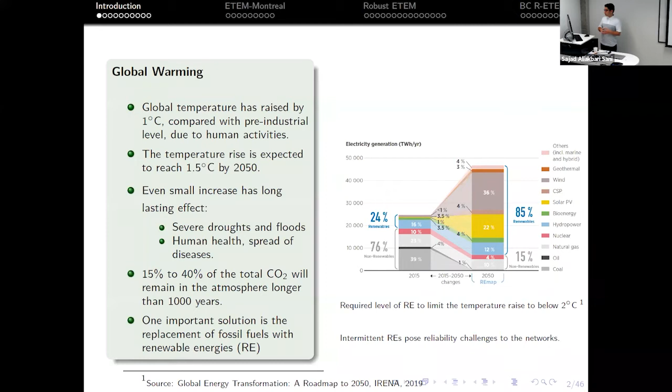But this is not easy because it poses challenges, since renewable energies are intermittent, posing reliability challenges to the network. One way to cope with this issue is to add flexibility to the power network.

Flexibility of the power network is defined as the capability of the power network to respond to changes in the supply side and demand side.

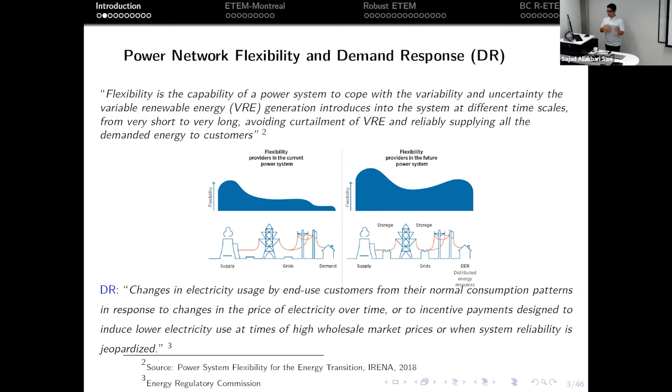The flexibility in the demand side is called demand response, meaning the capability of the network to abruptly reduce demand when, for example, the price of electricity is high or when the system is in jeopardy.

One important source of providing demand response is electrical vehicles, grid-integrated electrical vehicles. They are specifically important because, first of all, they are considerable - they consume a lot of energy in the network. Secondly, because of the timing of their use, they can be controlled by the power network operators.

But there are some challenges. For example, they are spatially and temporally imbalanced loads, and because they were developed for another purpose - to satisfy mobility demand - any change imposed by the power network can interfere with the operation of the mobility demand.

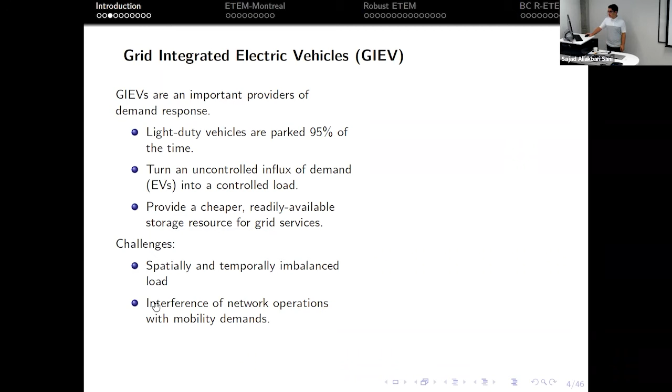In this research, we want to first, using the capacity expansion planning problem, identify a long-term grid investment plan considering demand response. Second, we want to address one of the most important issues in demand response: the uncertainty of the demand response. Then we want to focus on the demand response provided by electrical vehicles, and integrate their uncertainty into the capacity expansion planning problem.

But what is the capacity expansion planning problem? It is a long-term classical energy network problem that gets as input a prediction of the future of technologies, useful demand, fuel costs, and other resource availabilities. And it calculates the optimal investment and installation of each technology, and optimal energy procurement.

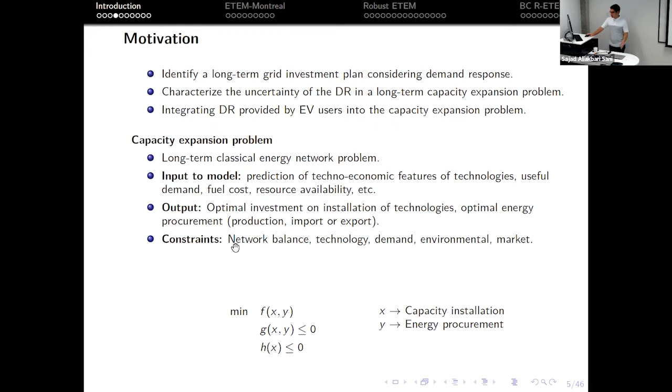There are some generic constraints, including network balance constraints, technology, demand, environmental, and market constraints.

In this research, specifically, we focus on the ETEM model - Energy, Technology, Environmental Model - which is a specific capacity expansion planning problem from the family of MARKAL-TIMES models. It's a long-term capacity expansion problem with a horizon between 30 and 50 years. It's a large-scale linear program with the objective of minimizing the total cost of the system.

One salient feature of ETEM is that it explicitly models demand response. It is important in capacity expansion to consider demand response because it acts as a kind of reserve capacity for the system, meaning that when we invest in providing demand response, we need to install less physical technology in the network.

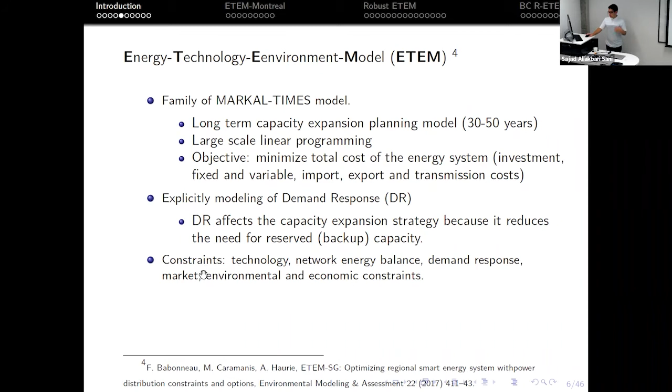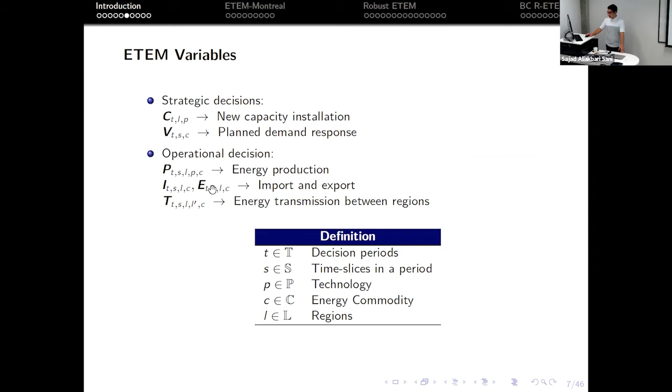Let's have a closer look at the variables in ETEM. There are two categories of variables: strategic decisions, including new capacity installation and planned demand response, and operational decisions, including energy production by each technology, import and export of energy from and outside the system, and energy transmission between different regions.

The objective function minimizes the discounted total cost of the system, including the investment cost, fixed cost, variable cost, import, export, and transmission cost.

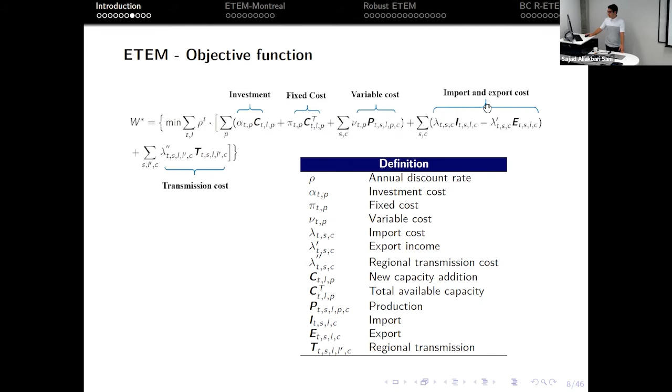Here are some important constraints of ETEM. ETEM has many constraints; I just mention some of them to give you an idea of what ETEM is modeling.

We have energy balance constraints that guarantee that the procurement of each energy commodity C at each time T and time slice S should be greater than its consumption. The procurement itself includes the production of energy, import of energy, and net transmission from different regions.

We have capacity constraints that say the available capacity of each technology is the summation of the previously added capacity to the system, plus whatever we have already installed in the system before the start of the planning horizon. Then we force the production of each technology to be smaller than the available capacity.

We have technology efficiency constraints that relate the input and output of each technology.

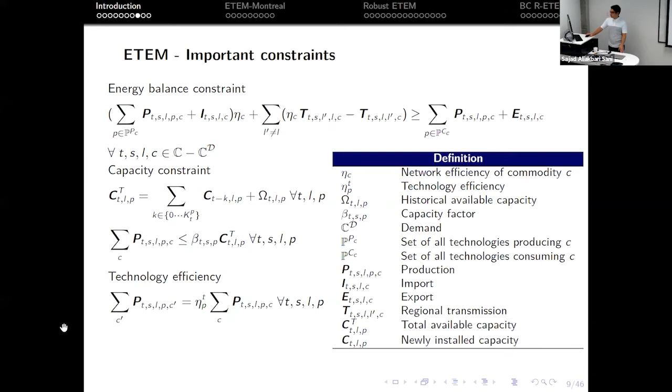Here is one important constraint in R-ETEM: the demand response constraint. This is how R-ETEM models demand response. In the first constraint, you see that the production of energy service C should be greater than the total demand. This total demand consists of two terms: the first is the annual demand, and this variable V is the demand response, which optimally distributes the total demand at each period to different time slices in a day.

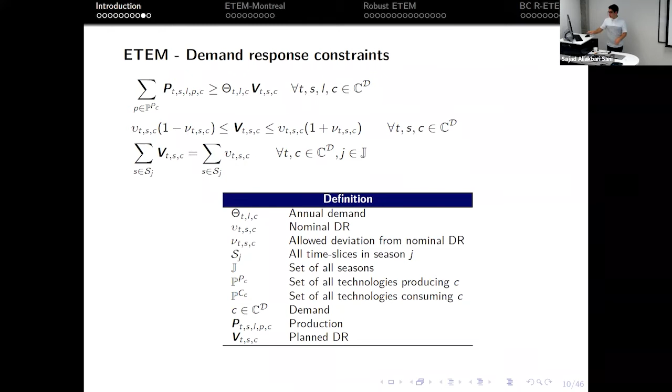We define a bound for the value that this demand response can get, and this bound is around the nominal value for the demand response. We also force that the summation of the demand response at each season equals the summation of the nominal value, meaning we are not allowing the model to shift demand response from one season to another. We are only shifting the demand from one time slice in a day to another time slice in a day.

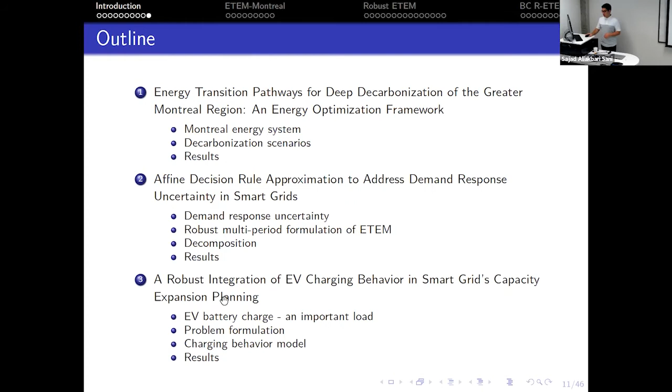Having this introduction, I will present three of my papers. In the first paper, we use R-ETEM to identify the energy transition pathway for deep decarbonization of the Greater Montreal region. In the second paper, I investigate integrating uncertainty into the capacity expansion planning problem of R-ETEM. And in the third paper, I focus on the demand response provided by electrical vehicles.

The first paper is published in the Journal of Energies.

We know that Quebec plans to reduce total GHG emissions to 37.5% compared to the 1990 level by 2030. In order to reach this target, there are already-in-effect strategies, including spending a budget of $6 billion to accelerate electrification in the transportation sector, promoting the utilization of bioenergies, renewables, and natural gas in the commercial and industrial sectors, and improving the performance of final energy consumption in residential buildings.

But the question is, among all of these investment options, what is the best basket of options to invest in order to reach the environmental targets?

In order to answer this question, we model the entire energy chain of the Greater Montreal region from resources to useful energy. Then we optimize the expansion of the system in order to satisfy future demand under different environmental scenarios.

Why are we using R-ETEM? Because R-ETEM is suitable for modeling at an urban scale, as it focuses on both generating technologies and technologies on the demand side, which are end-use technologies.

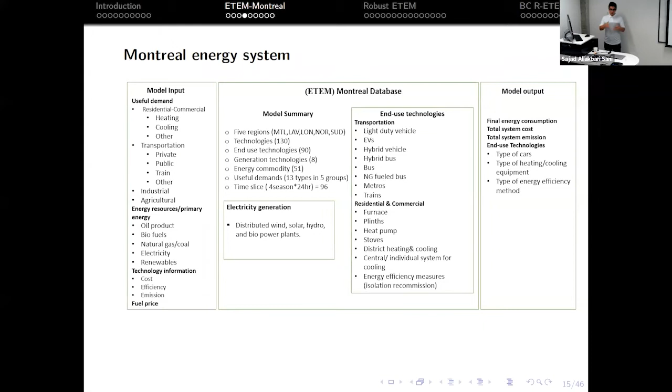The model output is the optimal capacity expansion planning and the optimal investment in different sectors in order to reach the environmental targets. In this slide, we have defined different scenarios for the GHG emission reductions.

The business as usual scenario assumes there are no constraints on the total emission. There are only already-in-effect policies, for example encouraging electric vehicles by the government.

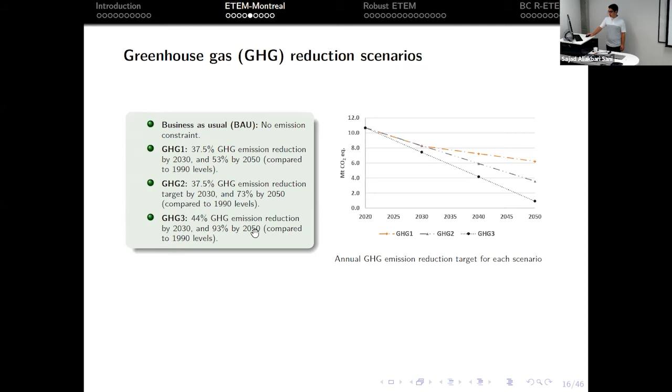GHG1 assumes 37.5% GHG reduction by 2030 and 53% by 2050. The more stringent scenario is GHG2, which assumes 37.5% GHG emission reduction by 2030, linearly reducing to reach 73% by 2050. The last one is GHG3, which assumes 44% reduction by 2030 and 93% by 2050.

This slide has a closer look at the transportation sector and looks at the main strategies in the transportation sector. First of all, you see that the consumption of gasoline will reduce drastically, and it will be replaced by electricity. This is even in the business as usual scenario, mainly done by investing in hybrid vehicles in private transportation and diesel, gas, and hybrid buses in public transportation.

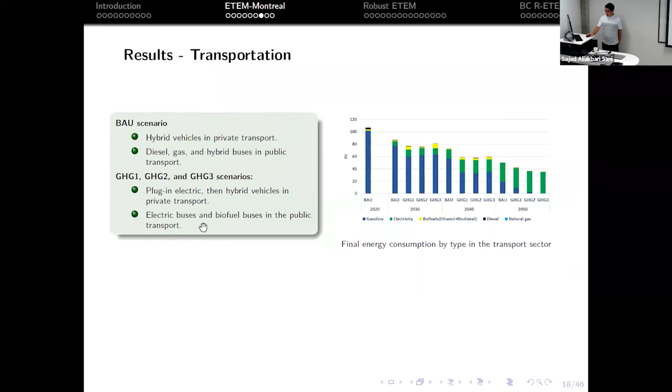But in the more stringent scenarios, including GHG 1, 2, and 3, the model chooses plug-in electric vehicles rather than hybrid electric vehicles, and electric buses and biofuel buses in the public transportation sector.

This slide has a closer look at the residential and commercial sector. You see that in 2020, the main fuel consumed is electricity, and in the commercial sector, it is natural gas. In the business as usual scenario, in the residential sector, because there is no environmental constraint, the model shifts to natural gas.

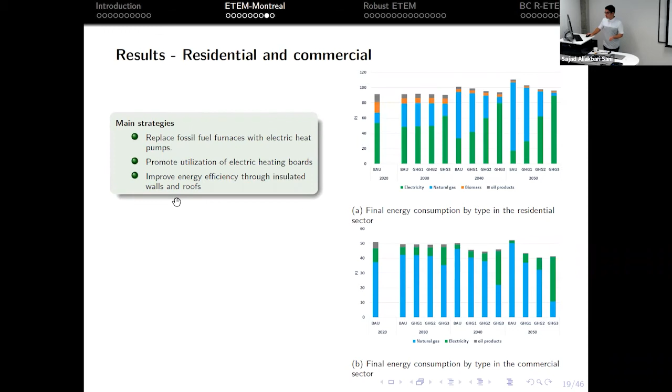But in the more stringent scenarios, GHG 1 to 3, electricity will take most of the share in total energy consumption in the residential sector. We see a similar pattern in the commercial sector, achieved by main strategies: replacing fossil fuel furnaces with electric heat pumps, promoting utilization of electric heating boards, and improving energy efficiency through insulated walls and roofs in the residential sector.

So in the first paper, we used the R-ETEM model to model the entire energy chain in Montreal island, and we defined different environmental scenarios to see the contribution of each sector in reducing total GHG. We saw that in the residential and commercial sector, the main strategies were utilization of heat pumps and electric heating boards, and investment in energy efficiency of buildings, which reduces total energy consumption.

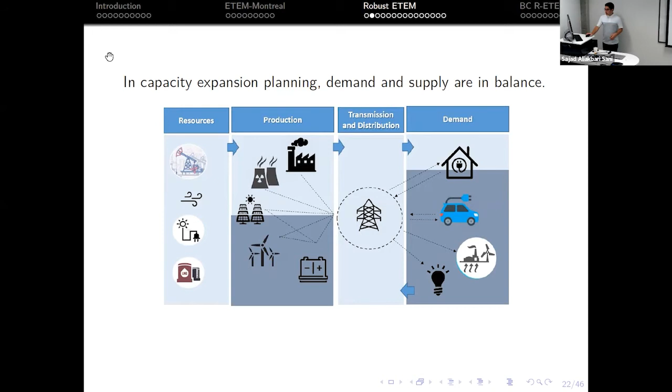In the second work, we focus on the uncertainty that arises from demand response. We know that in an electrical network and capacity expansion problem, demand and supply should always be in balance. To guarantee this balance in the traditional network, flexibility of the supply side was proposed. For example, we had flexible technologies that could come online abruptly, and energy storage technologies.

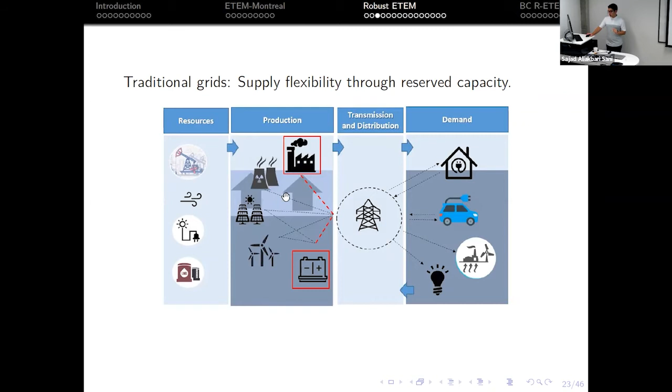With any deviation in either the supply side or the demand side, we could reduce or increase production abruptly. But in the smart grid, with the increasing share of renewables, we need flexibility on both sides, both the production and the demand side.

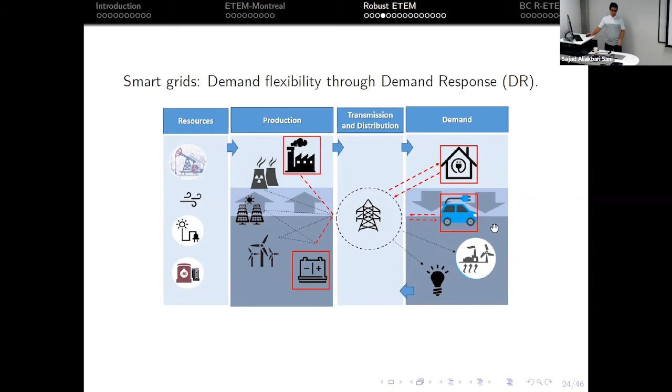The flexibility in the demand side is called demand response. Demand response is considered as a reserve capacity. When we invest on the demand side in a smart grid, we need fewer physical technologies to add on the supply side. That's why demand response is considered as a kind of reserve capacity.

But it is challenging for planning, especially in a long-term planning problem, because we cannot exactly estimate the actual contribution of people in demand response forecast. So on one side, we might invest a lot in physical technologies but have a system with idle technologies most of the time. But on the other side, we might invest on the demand side, but we may have the risk of capacity shortage in the future. So the question in this research is: what is a risk-averse capacity expansion policy considering the uncertainty of demand response?

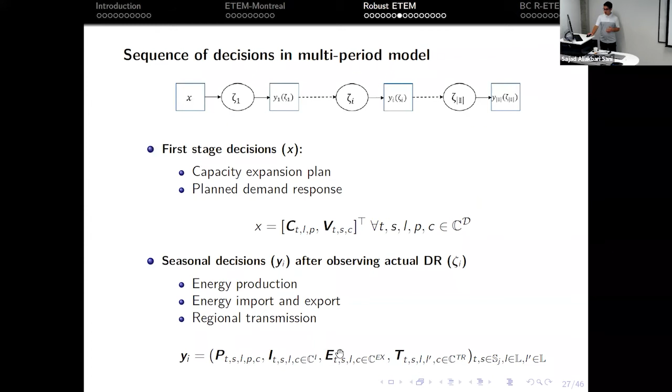These two decisions are gathered in variable x, and based on a seasonal period, when we have the actual information about the actual demand response, we decide on the seasonal energy procurement.

Energy procurement itself consists of energy production, import, export, and regional transmission. So our robust multi-period model will have this form: we have a min-max problem. We are minimizing our decision variable x and y, and the nature is maximizing, or choosing the worst scenario regarding the demand response.

The thing that is important here is that the variable y is adaptive with respect to the uncertain parameter, meaning that at each season, first we observe the actual demand response and then decide on the energy procurement. This model is known to be NP-hard and cannot be solved.

One way to cope with this issue is to approximate that using an affine decision rule, meaning that we let this function, from any function it could take, we force it to take the affine format, and we replace this variable y with y-i plus capital Y zeta.

After doing this technique, we can use robust optimization techniques in order to reformulate this min-max problem into a minimization problem, a larger scale minimization problem, and this can be solved using commercial software.

So this is actually the end of the story. We have a minimization problem and we can solve it using a commercial solver. But the point is that the capacity expansion planning problem itself is a large scale optimization problem, and when we use the robust optimization technique, we are introducing new variables and new constraints, so the size of the problem becomes very large.

One feature of our problem is, if we look again at the problem, we have seasonally separated variables and seasonally separated constraints, and they are coupled with the variable x, which is alongside the problem. This format encourages us to use a kind of Benders decomposition algorithm.

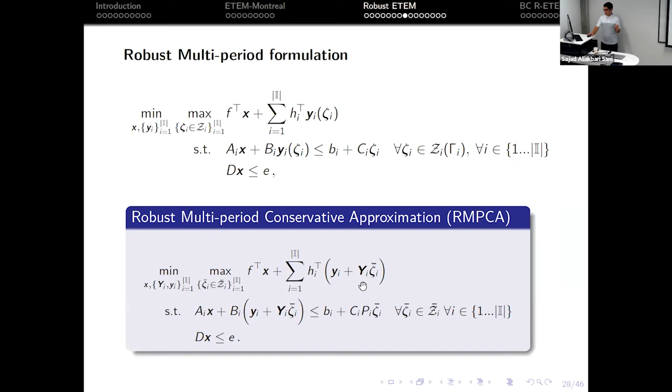In the sub-problem, we push the dynamic part of the decision rule. If you remember, our decision rule had two parts, the static part small y, and capital Y. So we push the capital Y to the sub-problems. Our sub-problems are min-max problems, and our master problem is a minimization problem.

In order to avoid the Benders decomposition being complex, and for example removing the feasibility cut in our algorithm, we are assuming that there is one technology in the system, which is called uncapacitated technology. The role of this technology is that whenever for any solution for the X and Y, meaning any installation policy and any procurement decision, the demand can always be satisfied using this uncapacitated technology.

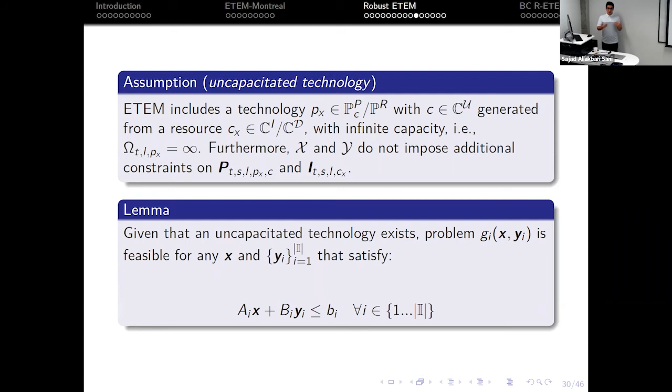But the point is that we set the price of this technology high enough to make sure that this technology will not be used in the optimal solution. So having this assumption, we know that any feasible solution of this constraint, ax plus by smaller than b, will be feasible in our subproblems. Okay, so we implement the traditional Benders decomposition algorithm.

This Benders decomposition is an iteration between solving the master problem and subproblems. For example, we solve the master problem first and obtain the optimal values, then signal these values to the slave problem, solve the slave problem and update the upper bound, and also calculate the optimality cut. Then we add the optimality cut to the master problem, solve this master problem again, and we iterate until the upper bound and lower bound converge.

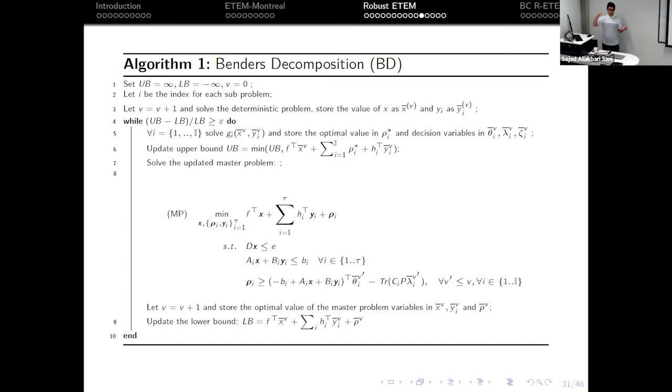But we have made two changes in the Benders decomposition in order to further make the solution algorithm efficient. The first idea is that we are adding some valid inequalities to the master problem.

These valid inequalities are associated with the last m scenarios identified in the previous iterations. This is actually a primal function associated with scenario zeta L, and this scenario is associated with the previous iteration identified in our algorithm.

The second idea is that at each iteration, when we are solving the master problem, we are actually solving a robust optimization problem. So it is possible that this optimization problem has multiple solutions.

One way to implement traditional Bender's decomposition is that it is the solver that decides which solution to pass to the sub-problems. But here the idea is to more wisely choose between these robustly optimal solutions by solving an extra problem with a new objective function, which is a convex combination of the previously identified scenarios.

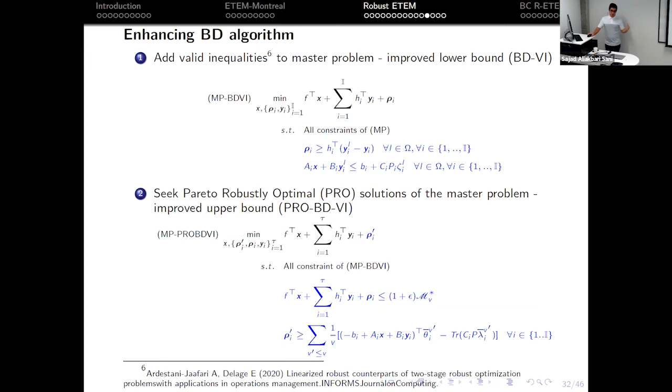By solving this problem, we are actually obtaining robustly optimal solutions that are Pareto-optimal among all the robustly optimal solutions in our master problem. With this idea, we are improving the upper bound because we are sending wiser information from the master problem to the sub-problem. So the upper bound will be improved.

Okay, so let's have a look at the results. In order to measure the performance of the robust optimization problem, we are solving three models. The first model is the deterministic model, which assumes there is no uncertainty with respect to the demand response.

The second one is the static robust model, which assumes there is uncertainty and we are solving the robust model, but we assume there is no adaptability in the second stage decision, meaning all decisions need to be taken at once, with no adaptability in each period.

And the last one is the RMPCA, robust multi-period conservative approximation, the method that I just described. We have the robust model, and our procurement decisions are adaptive with respect to the realized demand response.

After solving these three models, we captured the first stage values, and then we generate 1,000 scenarios for the actual demand response.

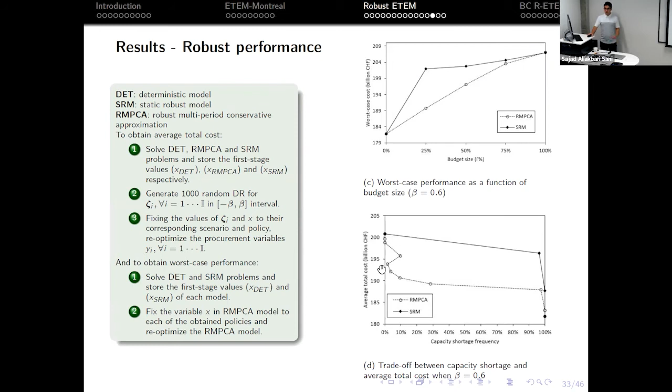It builds a lot of capacity, so we don't have any capacity shortage, but it comes at a high cost to the system. In this figure, you can see that for some points, associated with different budget sizes, we can reach up to, for example, 2% capacity shortage for a lower average total cost. So this figure gives us a trade-off between the average total cost of the system and the frequency of capacity shortage in our scenarios.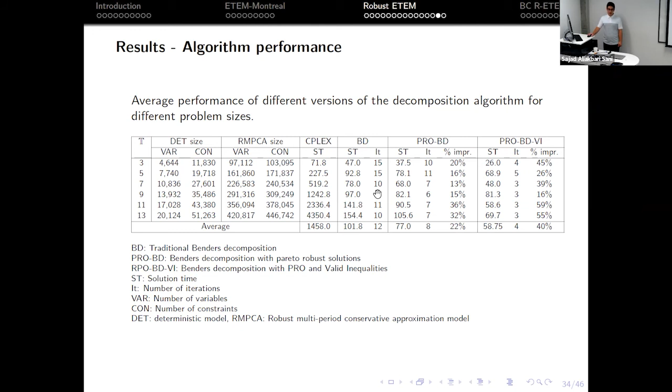PRO BDVI is performing 40% and PRO BD is performing 22% better than the traditional Bender's decomposition in our model.

So in this paper, first we introduced the demand response uncertainty into the capacity expansion planning problem. We reformulated this as a robust multi-period conservative approximation problem.

We had a multi-period decision-making structure. In the first stage, we decided on the capacity expansion, and on the next stage, on a seasonal basis, we decided on the energy procurement.

We developed an enhanced version of Bender's decomposition to efficiently solve our model.

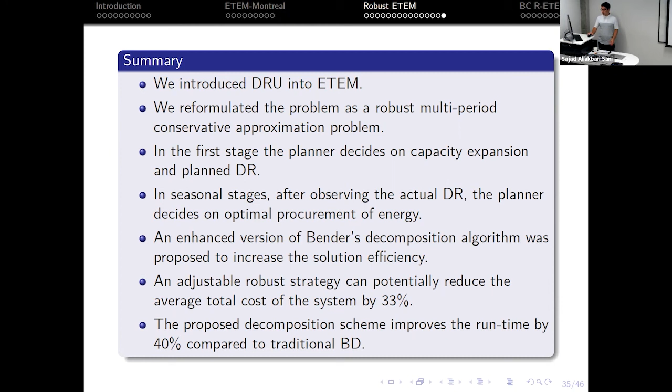The adjustable robust strategy could potentially reduce the average total cost of the system by 33%, and also the Bender's decomposition could improve the runtime by up to 40% compared to the traditional Bender's decomposition.

The last paper is robust integration of electric vehicle charging behavior in smart grid capacity expansion planning. This work is published in the journal Dynamic Games and Applications.

In this paper, we focus on the demand response provided by electric vehicles. As I said, electric vehicle battery charging is an important load in the electrical network. First, because it's rapidly growing and it is a considerable amount of energy.

Secondly, because they are temporally and spatially imbalanced load, and also because they are flexible load. They can be controlled by the supply side.

In this paper, first we develop a robust ETEM with the uncertainty of the demand response, this time which is provided by the electric vehicle charging load.

Then we develop a charging behavior model based on mean field game theory in order to simulate the actual behavior of the electric vehicle users in response to the price signal that they receive from the network.

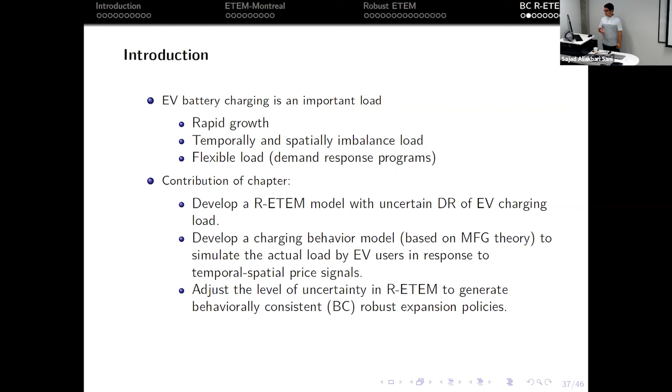On one side, in the supply side, we have the robust ETEM model. It calculates the optimal capacity expansion, and as a byproduct of solving this robust model, we can calculate the marginal cost of electricity. We also obtain the planned demand response.

Then we signal this marginal cost to a fleet of electric vehicles that are connected to the network, and we simulate their behavior with respect to the price signal they receive. Then we calculate the actual demand response. Using this information, we adjust the level of uncertainty in our robust ETEM.

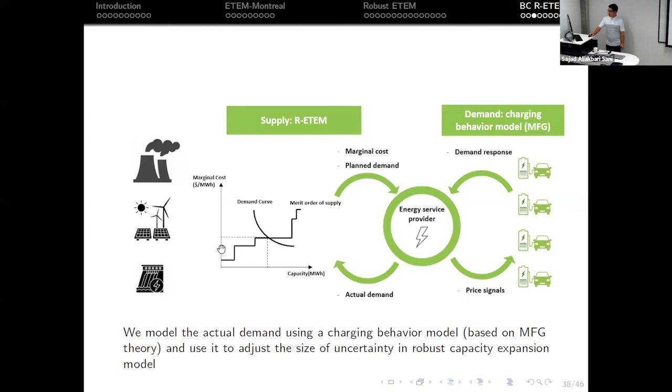Here is the general idea in a more formal mathematical format. In the robust ETEM, we have a min-max problem, minimizing over our decision variable.

The decisions use the same notation, but with this difference: variable X here is the capacity installation decision, and we show the planned demand as variable S.

Then the maximization problem is choosing the worst scenario that can happen for the demand response. By solving this min-max problem, we can obtain the optimal value as a dual variable, the marginal cost of electricity production. We signal this to a demand model.

In the demand model, a fleet of electric vehicles wants to minimize their total cost of consumption with respect to the price lambda star. This model gives us an optimal S hat, which is the optimal demand response by electric vehicle users.

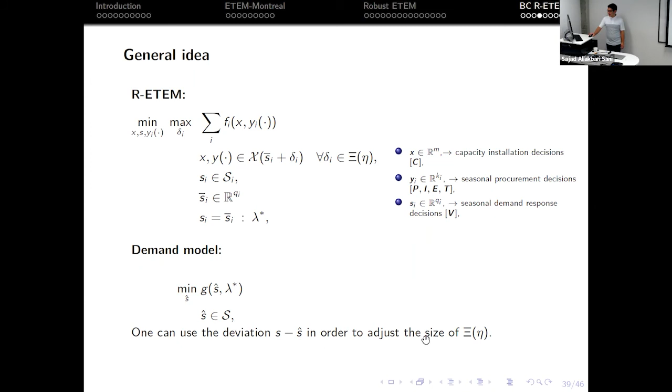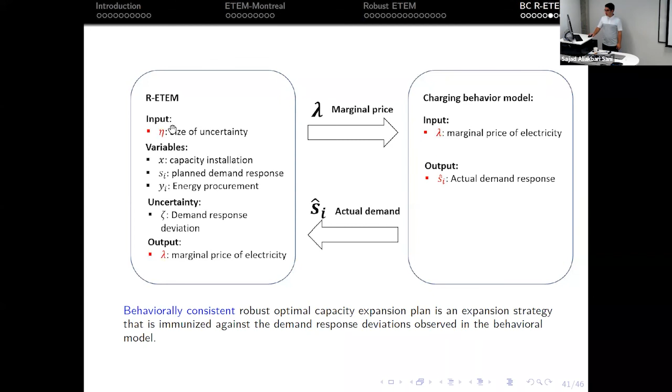And then, having this information, we adjust the level of uncertainty. In order to do this, we use a bisection algorithm, with an upper bound and lower bound for eta. Eta is the size of the uncertainty set.

We use an upper bound and lower bound, and then we choose the middle point. With the middle point eta, we solve the robust ETEM and obtain the marginal price of electricity. And then we solve different behavioral models for each region and obtain the actual demand response.

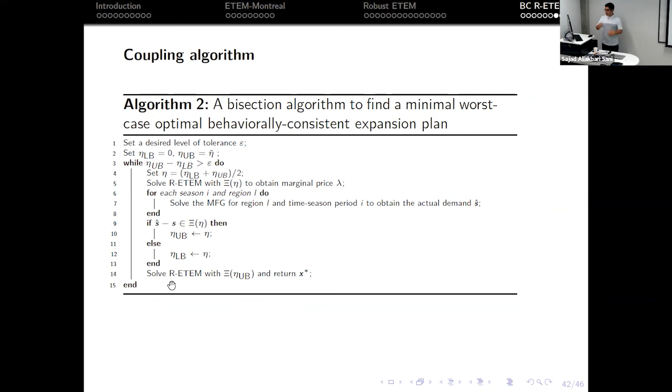Having this information, if the difference between the actual and planned demand is inside the uncertainty set, we update the upper bound in order to reduce the size of the uncertainty set. And if it is not in the uncertainty set, we update the lower bound. We iterate this until the upper bound and lower bound of the size of uncertainty converge.

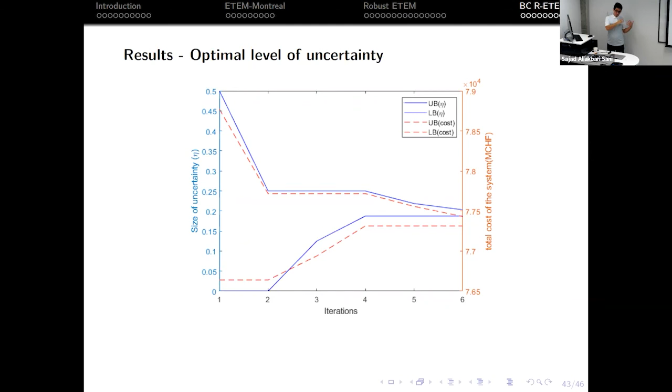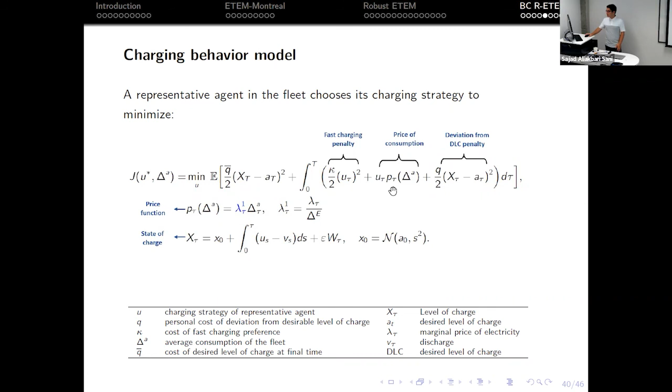Meaning that, for example, let's consider this parameter is high. It means that the people who want to charge their battery don't care about the price or its fluctuation; they want to charge their battery as soon as they want, regardless of the cost compared to the price of electricity. In this case, because their behavior is less related to price fluctuation, their behavior is more predictable, and can be predicted using, for example, mobility data, so the required level of uncertainty reduces.

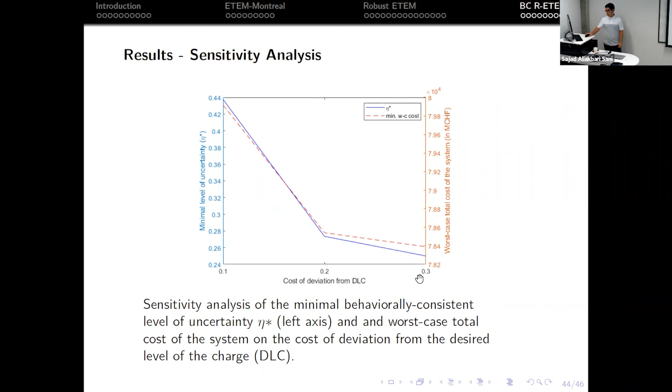Okay, so in summary, I presented in today's talk my 3 papers in my PhD. In the first model, I used a deterministic ETEM model in order to analyze the energy system of the Greater Montreal region and analyze different decarbonization pathways, and to obtain the optimal share of each sector in reaching the environmental target.

In the second paper, we focused on the uncertainty which comes from demand response, and formulated a robust multi-period conservative approximation that could reduce the average total cost by up to 33%. We also developed a solution algorithm to solve this large scale problem, which could increase the efficiency of the solution by 40%, or reduce the solution time by 40%, compared to the traditional Benders decomposition.

In the third paper, we focused on electric vehicles as a source of demand response. We developed a charging behavior model and used it to adjust the size of uncertainty in our robust capacity expansion planning problem. Our algorithm could reduce the total cost of the system by a 6.2% reduction.